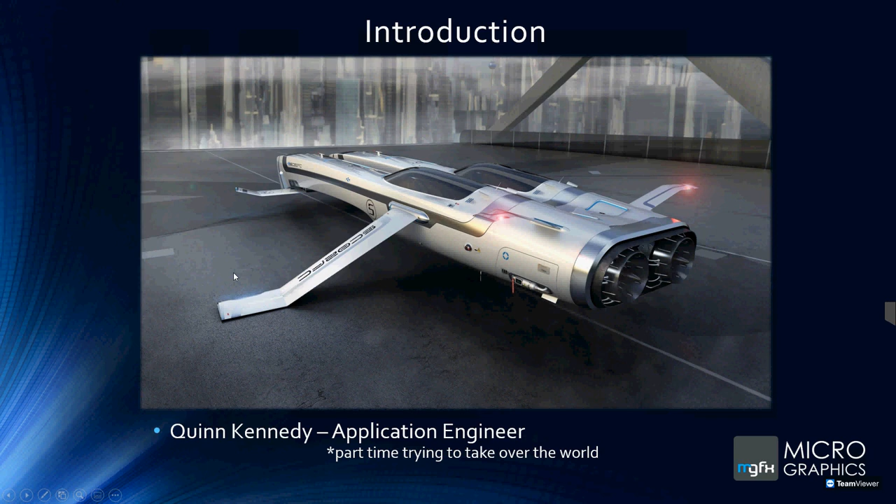So apart from that, for today our agenda, what we're going to be looking at: a quick look at what is actually the catalog and spec, why should we use it in P&ID, and how do we then link the P&ID to the 3D to make spec-driven PNIDs.

Then we're going to go in a slightly deeper dive as to how we can create new components in the spec editor. In my personal opinion, a little bit mislabeled being a spec editor, but I'll get to that. And then how to set up the connections between components in the spec, how to set up new joint types, etc., how to create some basic specs in the catalog, ordering your components in the priorities list, and then lastly, go on a bit about the branch editor itself.

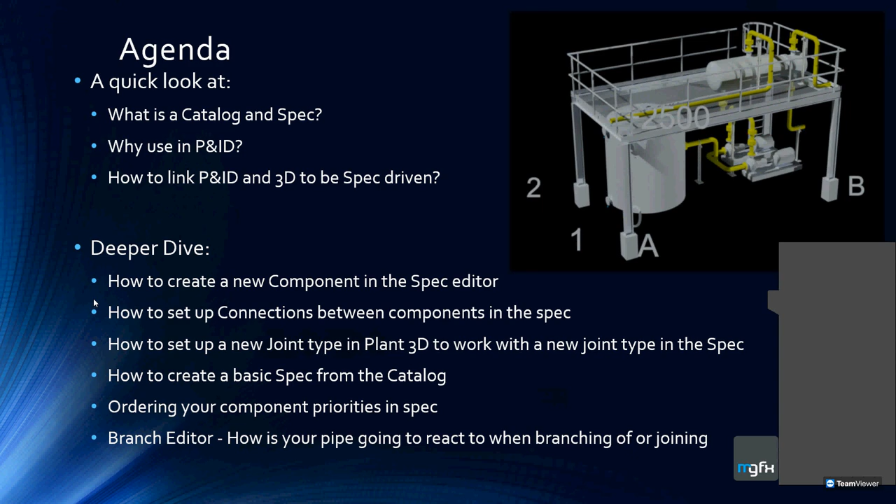So moving swiftly along, I'm really not going to try and make this a death-by-PowerPoint type system. I'm going to be working a lot in the actual program, showing you the various systems as we work through it, you'll see exactly what I mean. But I do have a few slides here to show you, just to give you a better idea as to how things actually come around.

So first and foremost, what is a catalog and a spec? Now you'll hear us talking about this a lot. By the way, American spelling, don't accuse me of misspelling things. That's the way Autodesk spells it.

So yes, catalog - easiest way to think of it is an entire warehouse of all your parts, all the components, everything, basically everything crammed into one system. Now, it would be illogical to work with a project with maybe every single pipe size and every single bend possible and everything, because it would blow your project up massively, and it may make it difficult to find exactly what you want. And this is where the spec comes along.

Now, this is the reason why there's a big difference between your catalog, which is everything in your system pertaining to specific items, and your specs, which you can think of as a shopping list. Like your shopping list, as you can see on the right-hand side, it would be your milk, your juice, butter. So that would be our specific type of pipe.

So if you're looking at Sans, it would be like the Sans 62 pipe, and then that would go with its related elbow. I know that they've got one of the ANSI specs or something like that that works with it. But that being said, your spec then is actually your list that's taken directly from your catalog, and it references back into the catalog.

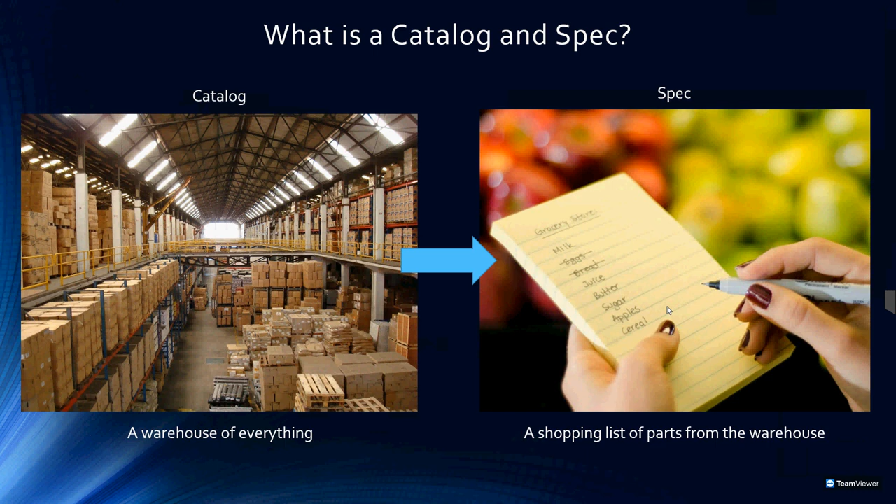So we do use spec and catalog interchangeably, but generally if you're referring to creating something - and that's what I mentioned a little bit earlier - it's about your catalog, because your spec editor is actually not just editing your spec, but your catalog in the background. But I'll get to that a little bit later.

So what we're going to also talk about now - and I'll show you the actual creation of the parts a little bit later - but firstly, why do we want to use our spec-driven PNIDs actually in the P&ID side? Because everybody's like, hey, wait a second, why don't you want to rather use that in the 3D side and keep them separate?

This can be a yes and a no question, because if you've got - which a lot of people do have - people who are working only on the PNIDs or only working on the 3D elements, you need to make sure that they're both using the correct components at any one point.

Like, for instance, if you've got maybe SS304 or SS316L or something like that, you don't want them to put in something that's maybe out of size, out of spec, not going to be used, etc. on that line. So it can immediately flag for them what is incorrect and point out straight off the bat that there is something wrong here.

So if you take a look on the right-hand side, you can actually see my 900 line. Maybe that was supposed to be something else, and somebody accidentally routed that line as 900. You can see it's already popped up at 900 there. And that is the correct one at 100.

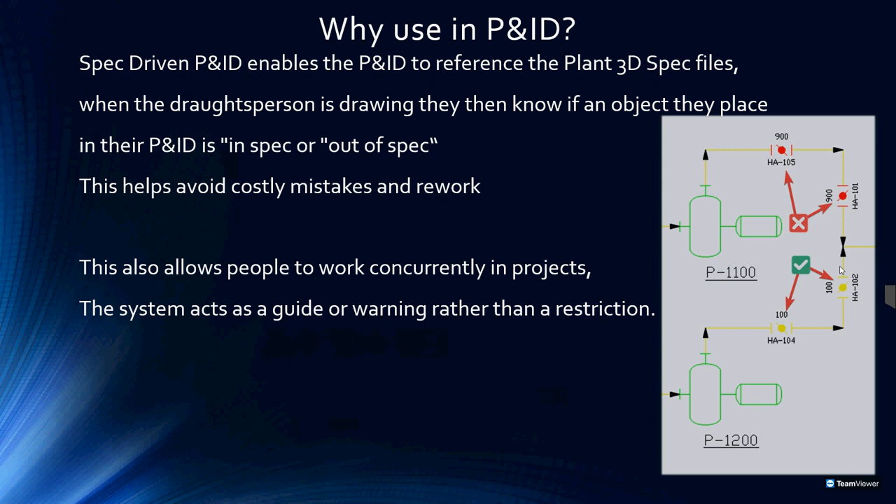You can see the line is the same color. The way that you actually do this is when you turn it on, which I'll show you in a bit, it actually then flags as you're drawing, is this correct? Is this in spec? By default at the moment, it is turned off for facilitating for projects that were created before, but it is very easy to turn it back on.

So how do we actually turn this on? That was pretty simple. You firstly just go into your project setup. Then underneath your P&ID DWG settings, Pipe Specs in P&ID, you just have to change it from a standard project, where it is generally sitting in, and this is what it should be by default, but change it to spec driven. And that's basically it for enabling a spec driven project.

You may need to, though this is unusual, actually go and map out. So you basically tell the P&ID side, hey, wait a second, this is what you're talking to in the 3D elements. And to do that, you'll see in the same place as how we were getting into our P&ID DWG settings. Underneath that, there's a little part which is Pipe Spec Object Mapping.

And that's pretty simple. All you have to do is go down the hierarchy, go into whatever object you're looking in. You may need to toggle between the different components from pipeline, valves, normal piping components, or specialty components.

By the way, I sometimes do get asked this question, why is there a difference? In fact, they're just trying to make it a bit simpler. Your normal piping component would be anything you would have in a normal pipe run without any specialty things in it. Basically it's something like what you would encounter in any single pipe run, so things like your elbows, your T's, your reducers, just simple items.

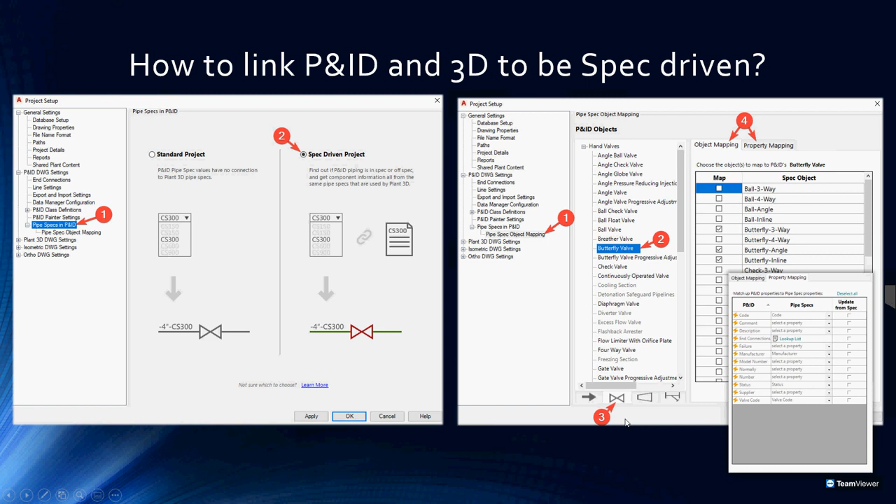So this is actually how we can then very easily make sure and check that our P&ID is going to work. It's going to speak the exact same language as our 3D model should, because if you are working with the same spec that your 3D guys are using, there's no reason why you should run into any errors there. You may run into the unforeseen thing that nobody's taking into account, but that would be the exception and not the rule.

Cool. So now that was basically our quick overview as to touching on the P&ID side. Now, the main thing that I normally get asked a lot is actually more in the 3D side, and that is things like this. So how do we actually create a component in the spec editor? How do we set up these connections and make these things work? Because if anybody's actually done this before, you would have realized that this is not the most straightforward and simple thing.

And if we jump actually into our spec editor, so this is our spec editor, and most people arrive here normally and they were like, oh, well, that's interesting. There's a lot of stuff here. Very interesting to see. Now, this is where it gets a little more difficult. And what I do normally say is, it's a good idea to start off with another pipe spec and catalog so you can see what other people have done and what works. But in this case, I'm just going to show you from scratch as to what we're going to be doing.

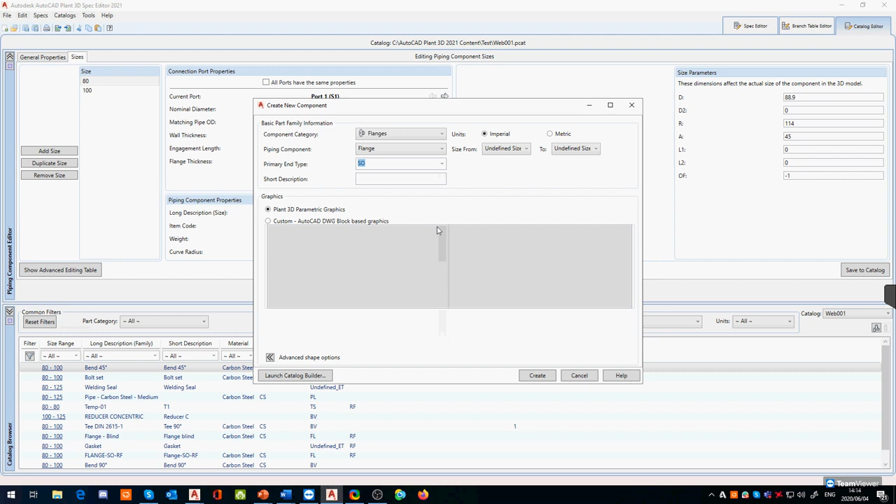So let's go to flange again, and I'm just going to select. If I remember correctly, this one was SO. Nope, not that one. Okay, just to make our lives a bit easier, I'm going to scroll across and find one that's similar to what I'm looking for. Let's just use the lap flange one, it'll be fine.

Select the sizing. In this case, I'm just going to go 80 to 100. Or let me just do 80, or 100 actually, that'll make our lives nice and easy. If you did have a range, you could do a range.

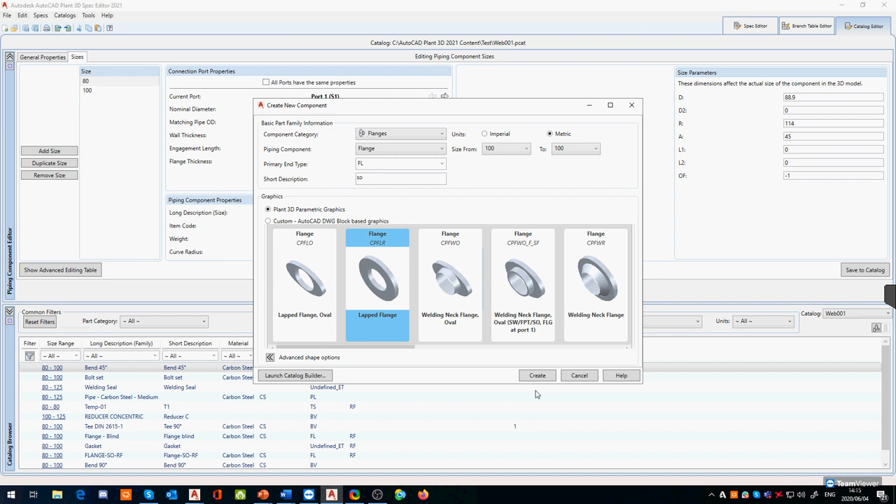Now what this will do is it will try and auto-populate a lot of it with default data. But when I go create, you'll notice that it does pull through some default data, but it's not a lot.

So in here, I can put in basically, this is, by the way, a key thing: you want to make sure that your pipe ODs match. Your pipe ODs, if they don't match, can cause you issues later on, and I'll show you what I mean when we get into a joint. That's 114.3. Yes, I use plant way too much that I know that offhand.

Length is 18, if I remember correctly. Diameter on the outside would be... D1 for 100, that is 220, if I remember correctly.

In this case, I'm just going to put flange as my long description. Flange 100. Now here's a quick trick that people always forget: a flange and most other objects have got not one port, but 2 ports.

And this is where a lot of people fail, in that they will go and prescribe for one port, but not the other port. And a thing like a flange, sometimes it's okay. What we can do is just say set all ports to the same.

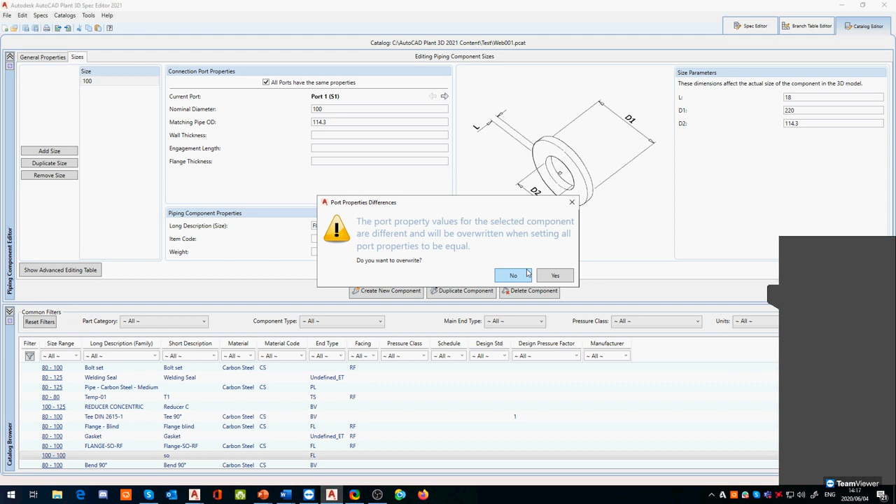It's going to give you a query: are you sure you want to do this? You can say yes in this case. Sometimes you don't, sometimes you do. This is very situational, and I'll show you now a small exception, what we do especially for things like flanges, which we have to be careful with.

Once I'm happy over here, I'm just going to jump to my general properties. And now in your general properties, you have to be very careful of 2 or 3 things here. Firstly, you have to give it a proper name because you and the computer has to know what you're busy calling out. So in this case, I'm just going to say it's going to be my SO flange

TMP. You can give it a compatible standard, but most of these other ones won't give you as much of an issue. You do want to give it maybe a short description. I'm just going to copy my description over there. But most of these, just make sure that whatever you're going to be mating it to, which I'll discuss a little bit later, is going to be the same.

Because if things don't match, it is going to give you issues down the line, which I'll show you now. Weight unit, kg, and these 2 are very, very important, because if you mess these 2 up, when you produce your ISOs, it is going to kick up problems.

Now for instance, I know my one over here, it should be, if I remember correctly, FLSO, so slip-on flange. ISO symbol key, I can't remember that one straight off, but I'll quickly look that up in a second. I'll come back to that.

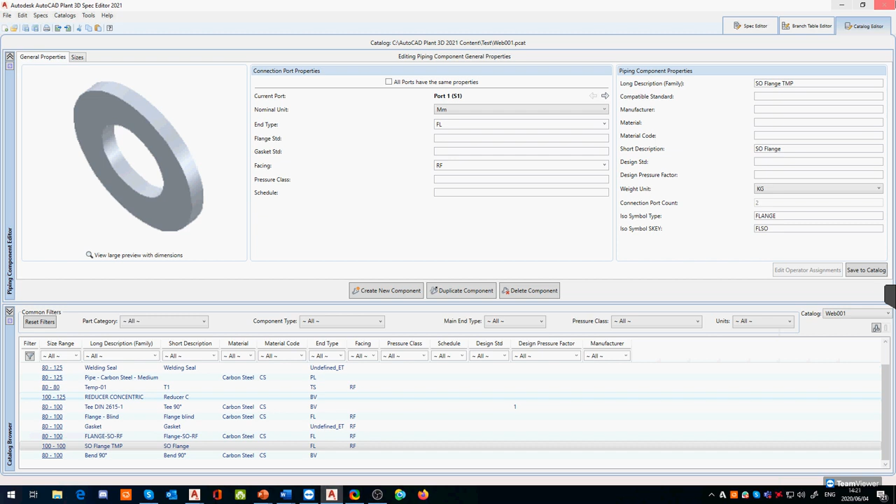And basically that is a very basic way of individually creating your parts. Just make sure, like I said, if you're in doubt of any of these, do what I've done here. Don't be scared to jump to another catalog, like there's the DIN one. And if I'm not too sure what something is or what it's supposed to be, I jump to, let's say, this elbow for instance. Elbow, there's its ISO symbol key, there's its information. So it's very fast and easy to just jump around, find a similar item, and then figure out what data you need to pull across.

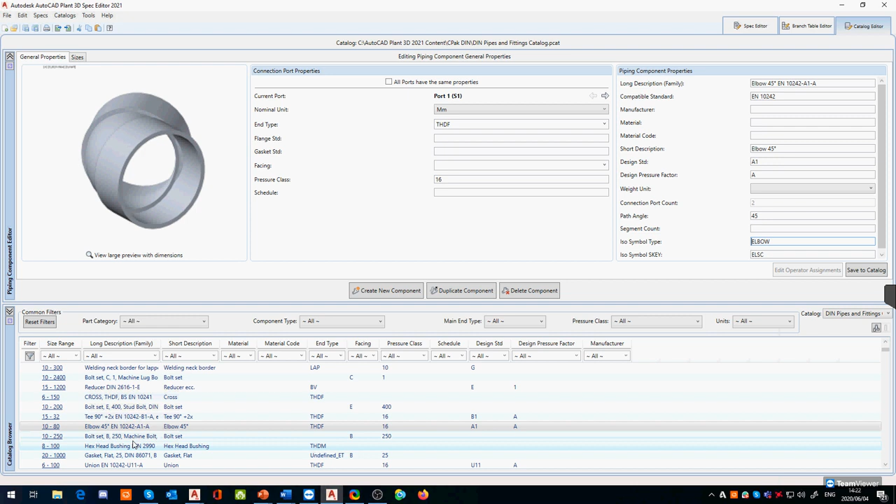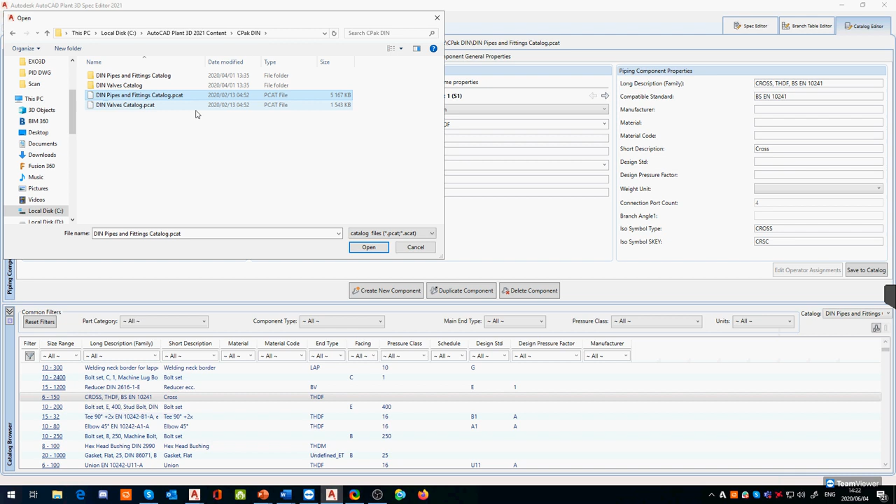And what you can also do, by the way, if you are inclined, is right-click. You see I'm in a different catalog completely, and if you need to open another catalog, you can just go open, and it should bring you to your location where it's automatically installed, and you can then find another catalog to open. I've currently got this one open, I'm just going to hit cancel here because it was pre-opened when I opened the system.

So for this case, let's say I like this tee. What I can do is right click on it, go copy, come back to my catalog drop down again, and go back into the one I've created here, and right click and paste it in. So you can actually grab bits and pieces from other catalogs and then reuse that data later on.

I do caution you to be very careful here because, like I said, if your sizes of your matching pipe IDs, sorry, ODs in this case, are not correct, it is going to kick up errors and cause you a world of problems. It can be very difficult to edit lots of information at once. This is when we will start using export to Excel, but that's a whole other garden path. I've actually written a blog and a few other things on this, which you can catch on the Micrographics blog site.

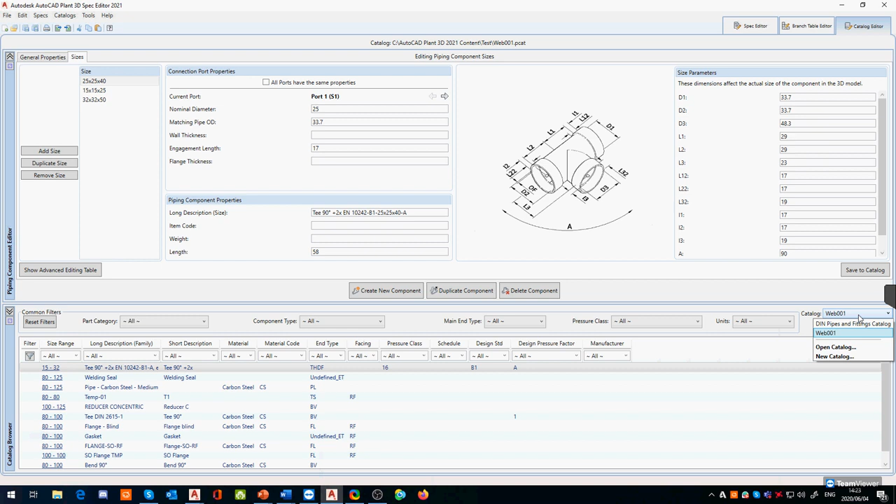Okay, that being said, this is how we would basically create our parts. Very, very, very quick intro into it. There's a lot that can go into it, and you can go all the way down the rabbit hole if you want. But now that we've got this parts, where do we go from here?

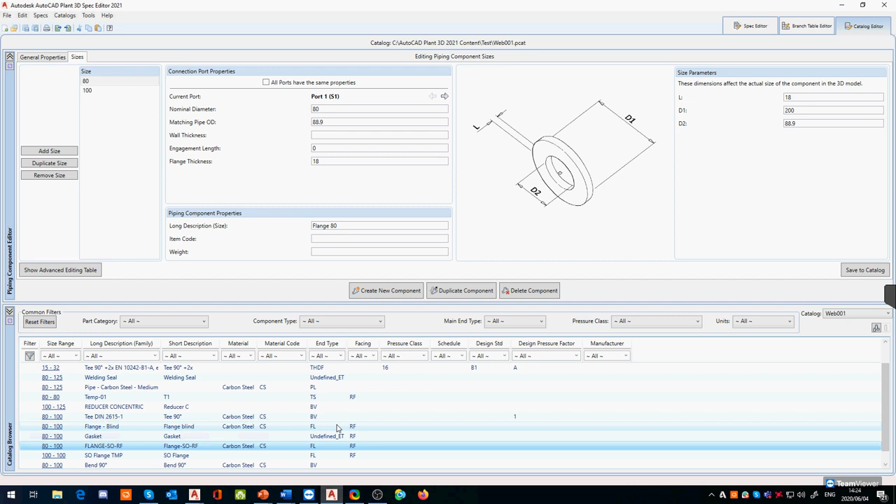In continuation of our rabbit hole, that's how we'd then set up these joints and stuff with it, and also with the spec itself. So using this, what I'm going to do is quickly create a spec out of the system. In this case, if I jump to my spec editor, my spec tab, you'll notice that I don't have any specs in here. I don't have any spec in use.

So what I can do is go File, New, create a spec. So what am I going to call it? MGFX 001. I know, very original. Load a catalog - if you do have a catalog that you've got currently that you want to load in and then edit with it, you can do that.

In this case, I'm actually working the other way around. I've already started working with my catalog, which I just find is an easier way of working, because I've already started with my warehouse of all my parts. And now what I'm going to do is take that warehouse, weed it out, and create my spec from here.

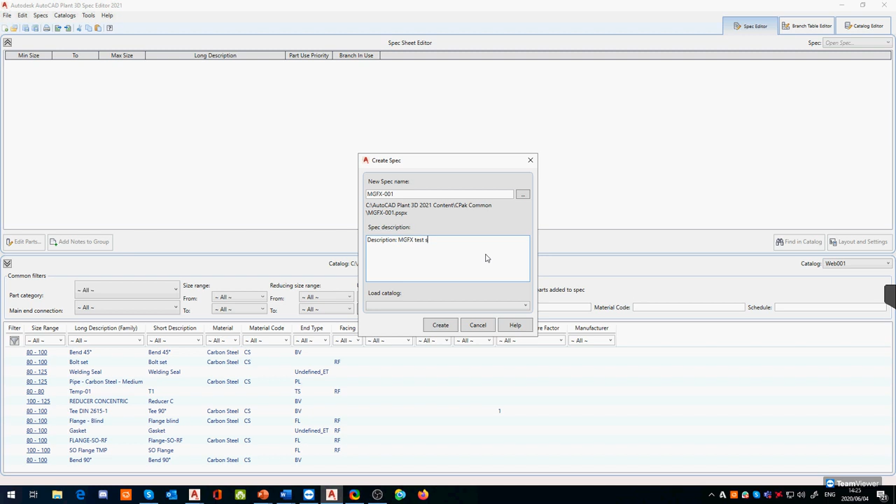Description, so I'm going to call it MGFX. You don't need to fill this out, I'm just filling it out for interest's sake. So, MGFX test spec. And I'm going to create.

And as you can see, I've got a wonderful blank spec. It just tells me the name of the spec, where its file location is, and some other information like save date, time, etc. At the bottom here, you can actually see my catalog that's already been opened. And if I jump to my catalog tab, you would see it's exactly the same information.

I'm just going to jump back to my spec, and I'm just going to select all the information. I'm going to shift and left click, and I've just selected all this information here. And I'm going to click add to spec. So now you can see all of it is now being added in here. Pretty cool.

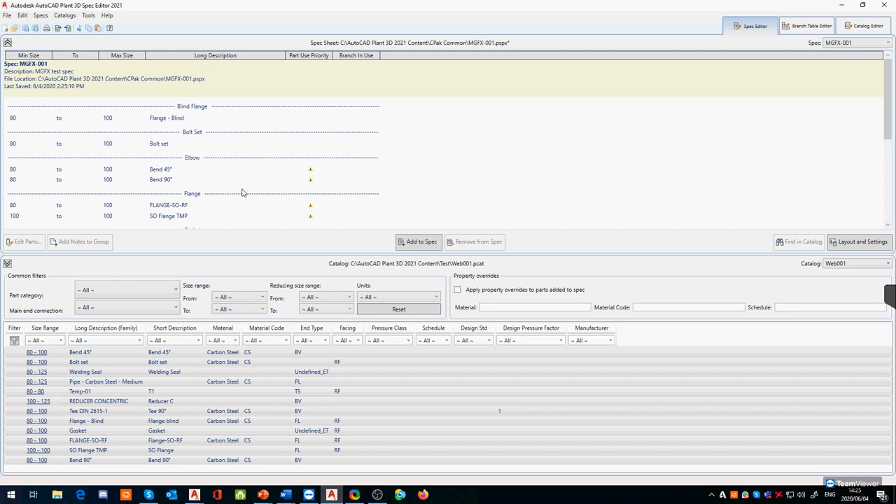Now, one of the things I'm going to get into a little bit later on is also this ordering part, but I'll get to that in a sec. So to actually run this off, what we've actually done is created this base spec, and we could hit save and carry on from there.

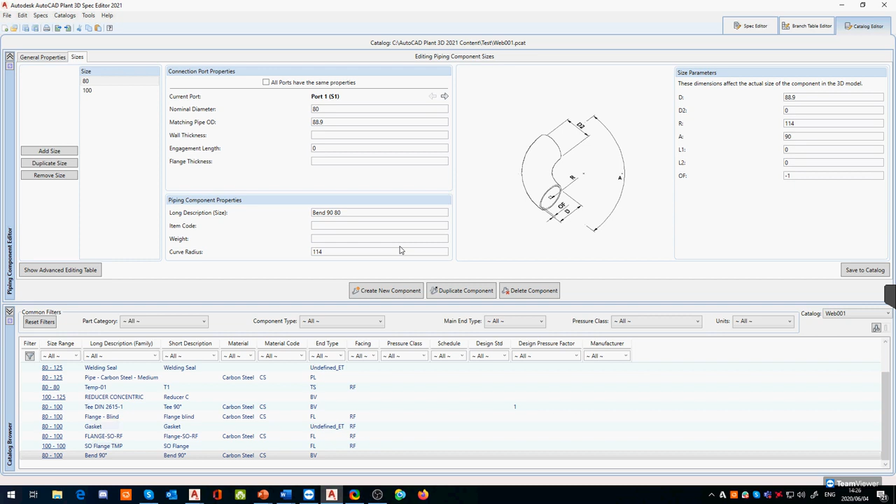But one thing I wanted to touch on beforehand was these little things we've been talking about, which is the end types. Now, this can be a little bit more difficult to get because you need to know that plant is separated into two areas - between the spec editor and also the back end of that intelligence that sits in the plant program itself. So you kind of have to know to do this in two sections.

So for here, for instance, with this temperature gauge, all I've done is created a brand new type called TS, temperature sensor. I don't know, it can be anything - you can call this whatever you want, you can say hello as a type if you wanted to. But for this case, I'm just going to keep it as TS because it's a new one I've made, temperature sensor. So that is what its end type is. You'll notice though, it's only got one port connection. So you can create this temperature sensor as whatever you want.

So once you've done this on the spec side - well, that's all you had to do here. Now what you have to do is create this on the plant side. I'm just going to quickly jump to my plant section. Oops, keep opening up the wrong one for some reason. Ah, there we go, sometimes it helps if you click the right window, hey. So now I've got my lovely plant model over here, just a little test one that I love to play around with.

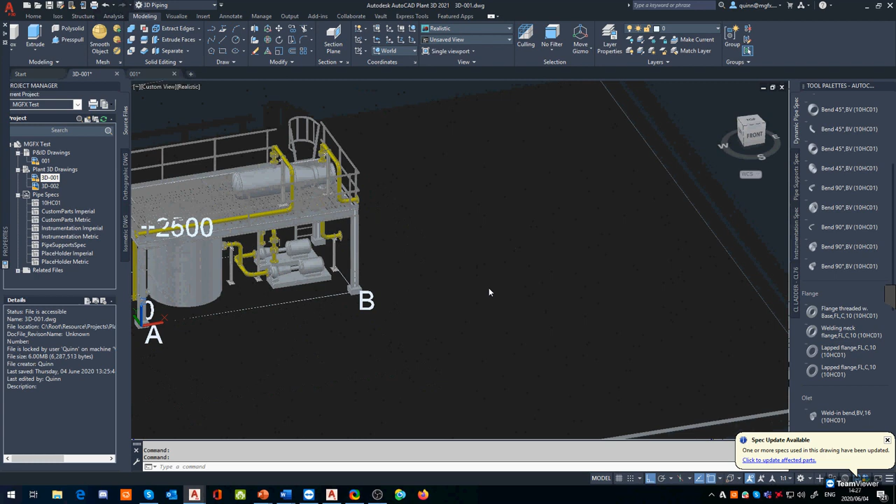But over here, what I'm going to do is quickly create the endcode for it. So plant endcodes is what we're after. You have to type in this command - I know it's a bit of a strange one. Just ignore the spec update bubble at the moment, but we need plant endcodes. Once you click plant endcodes, this plant endcode menu will pop up. Now, this is why the system is a bit convoluted and people don't do this correctly.

And I wonder, why is none of these things working? Why do I keep on getting these errors? This is one of the reasons why we keep getting these errors, actually, because they don't know about this specific step. And this is quite important.

So in here, you can actually see I've edited this in. But I'm going to just delete that endcode out. And I'm going to go add. And it's going to ask me to add an endcode.

So this endcode name, remember what we called it in the spec side? We said it's TS, that's its endcode, and what description it has. In this case, the description is it's a temp sensor. I'm being just a little bit lazy here.

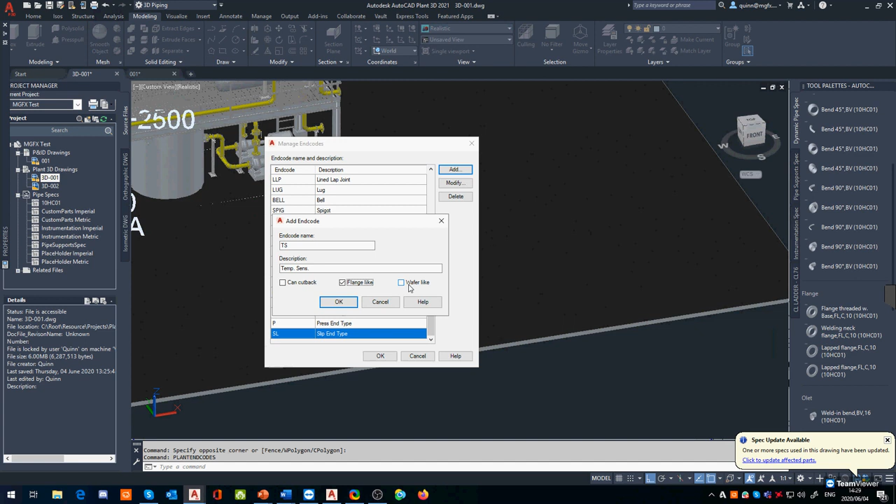And these are just extra options that it's going to give you. So is it going to be able to create a cutback joint? Is it going to be flange-like, which it actually is? Or is it going to be wafer-like. Just remember, wafer would be something like a butterfly valve. It's sandwiched, the butterfly valve itself is sandwiched between two flanges, hence the reason for a wafer connection. And if you actually do ever edit a butterfly, both of the ports are going to be wafer connection. I'll get to a little bit more on the ports in a second.

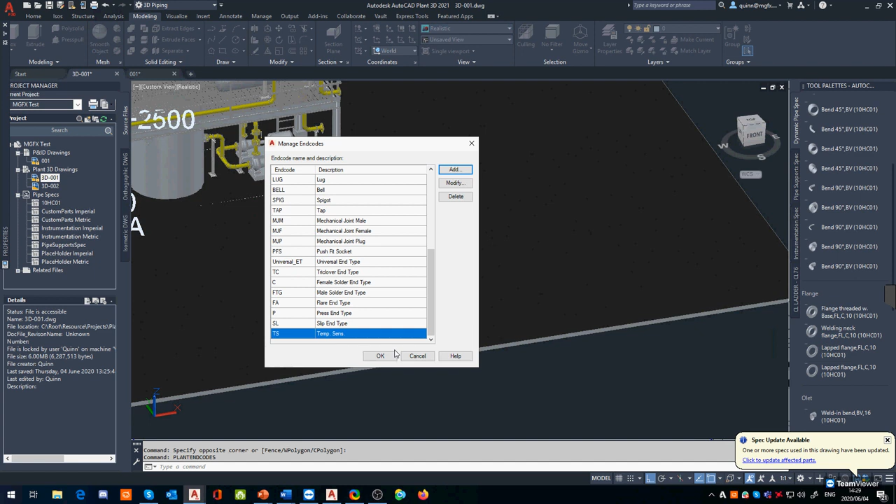For now, let's add the endcode. I'm just going to go OK. And you can actually see I've got my endcode TS and my temperature sensor in the description. And you can see all my other endcodes. Once you're happy that those are the ones you want, you can click OK.

And believe it or not, there's still more we have to do in the back end. As I said, a little bit convoluted. But in our Home tab, we just click the Data Manager, or Project Manager, sorry. We wait one eternity for the Project Manager to open.

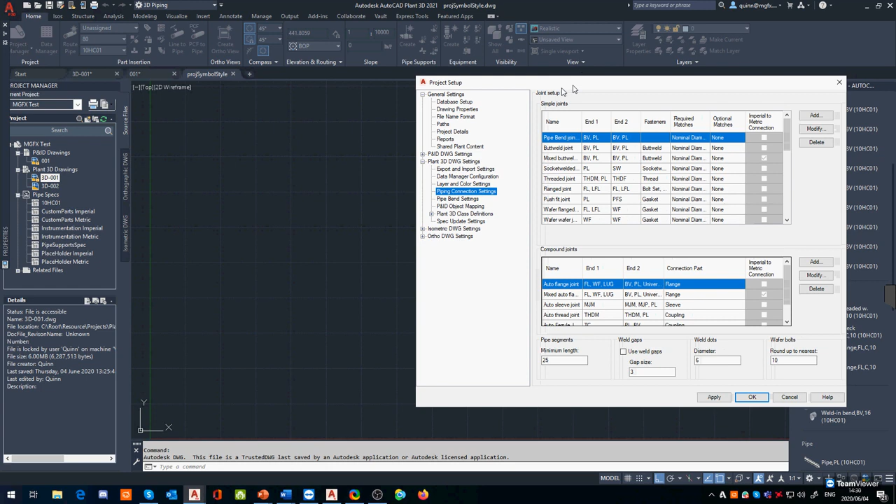Now, inside our project setup again, in our Plant 3D drawings, we have got our piping connection settings. So if you scroll through this, it can be quite daunting to try and figure this stuff out. But if you approach it just slowly and logically, it starts making sense.

Firstly, a simple joint is exactly as to what you would think. It would be, how does something like a flange connect to a piece of pipe? What joints are allowed and what joints are not allowed? In this case, you can see the pipe joint BV, so the butt weld, is able to connect to itself, BV, and also plain, and vice versa. So these two are interchangeable.

Same with the butt weld joint below. That was a pipe end that I was looking at. Mixed butt, same thing, but now socketed. It can only be plain to socket welded, or SW.

Now, how do we then add our own one in here? It's quite simple. We can either go add, and we can add in our own completely new joint, which is pretty simple. You just have to go TS, whatever it is. The display name itself is going to be, let's say, our temp sense again.

Now we've got our connection settings, and this is where people get a little bit confused because they've got the same stuff duplicated either side. But what I normally suggest is just, if it's going to be a single side, select the same as you would on one side as you do on the other.

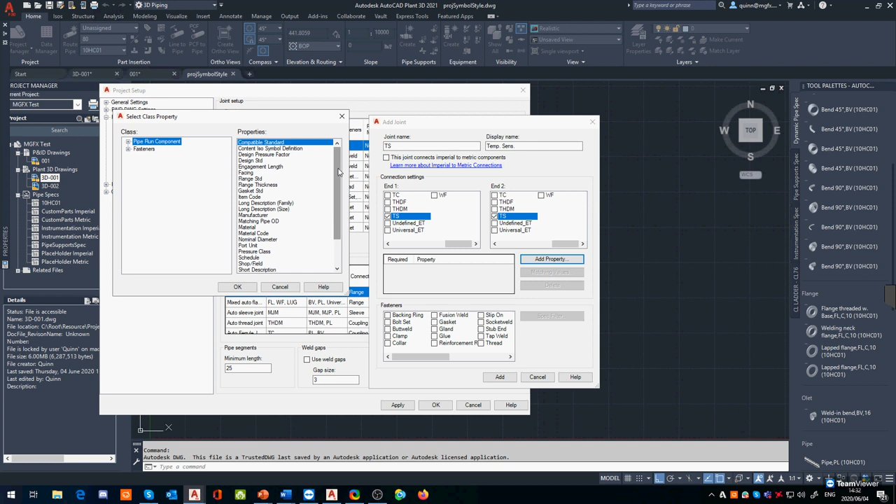So you want to do things like match the pipe ODs. Make sure that the pipe ODs match 100%. Add another property, because we want to do things like, does the facing match? So you'd see facing, do the faces match?

Cool. And vice versa, you can add all these, or what you could do is click on it and take them away if you wanted to, just in case you maybe want to loosen up the spec a little bit. You also get your fasteners.

How are they going to be attached together? In this case, something like a bolt set. Or otherwise, are they going to be welded? Depends on what you want. When you go add, doesn't look like much has happened, but if you scroll all the way to the bottom, you can see your new one has been added.

If you do get lost, if this is not making sense, like I said about the spec side, select just one of these, let's say the flange joint, and go modify. You can actually see all of the stuff, how it's set up and how it's working already defined, and this may aid you in trying to create your own ones.

For this case, I'm going to use my flange joints, and I'm going to go to my TS and just check them both, because this means that they will automatically apply. Then instead of normal accept, we've got modify. We can take it from there.

These compound joints that you see at the bottom here are basically, if you chuck a flange in the middle of a pipe, what's it going to do? In this case, you will auto flange it, connecting a flange to a flange, or however it would then add on. That's what this connection part is over here, a little bit more complex. I'm not going to get too much into that right now.

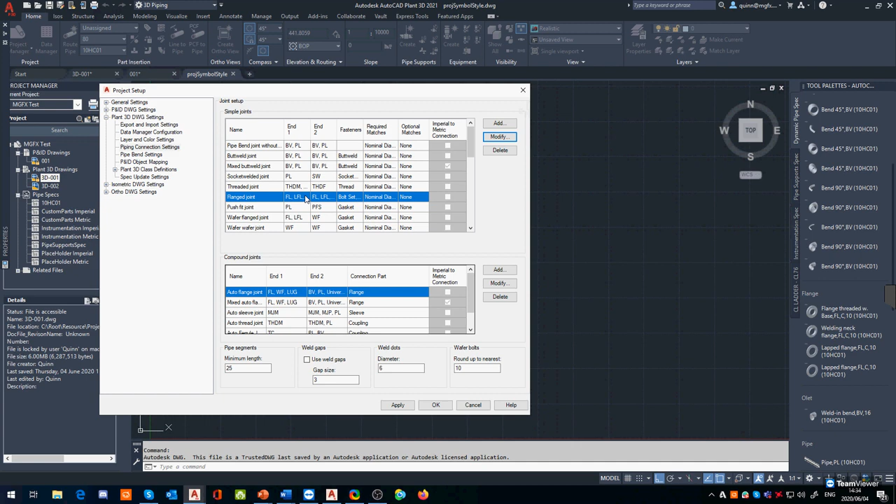What I wanted to do is just show you how this stuff is brought across. So with that, I'm going to click OK, and this is all the backing done that we needed to put this part together. I'm going to jump quickly back to my sheets over here, and remember my spec editor.

So this is part priority. This can be very useful because a lot of people complain, why when I'm trying to route my pipe, why do I have this 45 that keeps on going off every single time instead of my 90? Because your part priority is wrong. Now, you don't need to specify these, but it is very useful.

Now, in the actual real world, when we're routing pipe, this is what we want. We want our 90 degree to be used primarily, unless we want to change it to a 45 degree, because not as often we're going to be using the 45s. If this was the other way around and 45s were used, it would mean that if you did bend the pipe 90 degrees around, it's going to use two 45s instead of one 90, which if you start routing pipe in it, you'll get annoyed with it really fast. I can promise you that.

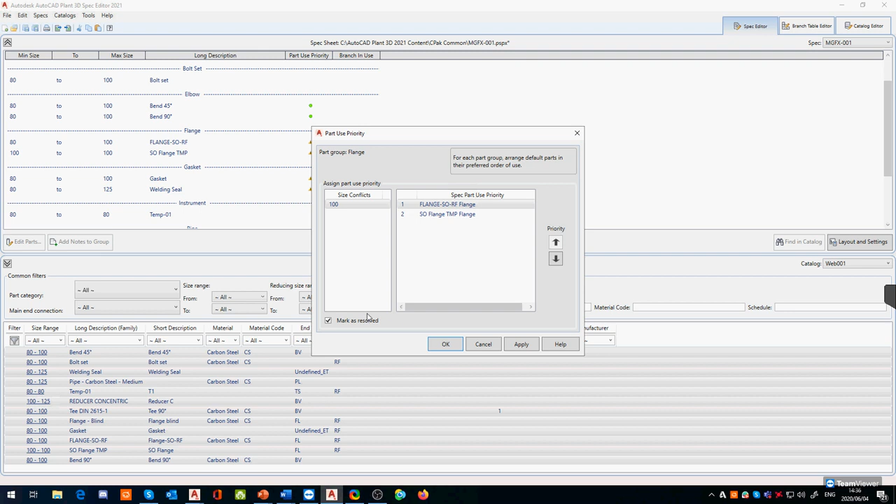Actually, I think in this case, I'm going to select this one, and I'm going to make sure that my size conflicts, my created one over there, is set first, just to make sure we avoid any issues.

So now that our spec is done, how do we load this into a project? This is pretty simple. If you were firstly creating a project, if you're starting from scratch and you didn't have any projects created, that would be the easy part. But now I've already created this project. What do I do now?

Because I can't just pull all the information, because when you first create a project, it's going to look in that catalog folder where everything is stored and bring everything through. And if you've ever expanded this list in a project manager, you'll know that this can be a lot of information. It's in fact an overload of information. So one of the first things I do is I go and I de-weed.

I'm merciless. I'll go through the whole thing and chop out anything that's not needed. Then what I do is populate it with the correct data, just to make my life easier. Or otherwise, I'll just chop out the stuff that's not needed.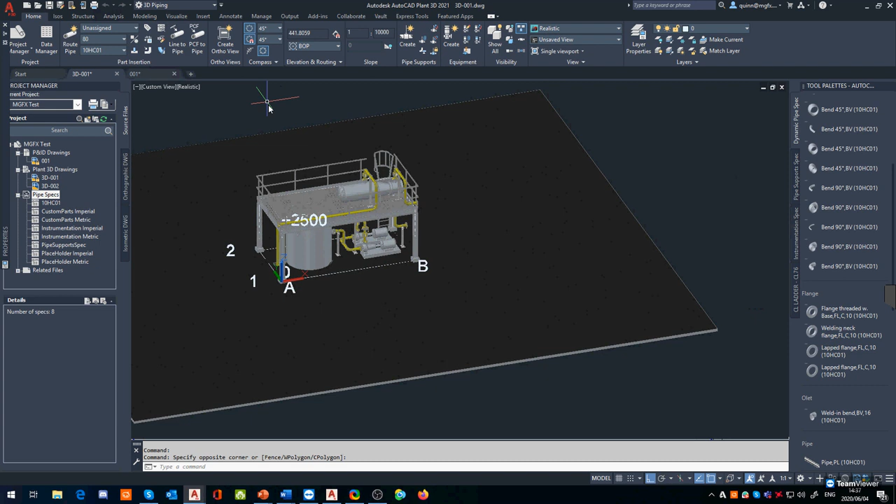Now that I've got this project already created and open, I want to load in the new one. It's very simple to bring this in. I'm going to right-click on the pipe spec and say copy specs to project. This will look in the original file location. I know I've saved it somewhere, and lo and behold, there's the one I created. Remember, the MGFX 001 and the timestamp at 25 past. Time flies when you're having fun.

When I go open, it loads it into this project. Now here's a critical little fact. When you do this, it's loaded it into your project. If you do want to edit the spec again, you have to remember to edit the spec itself, because it's created a clone, a copy of the spec. It's not referring back to the original one anymore. So if we want to make changes, we have to right-click on it and say edit spec. That would be your easiest way of doing it.

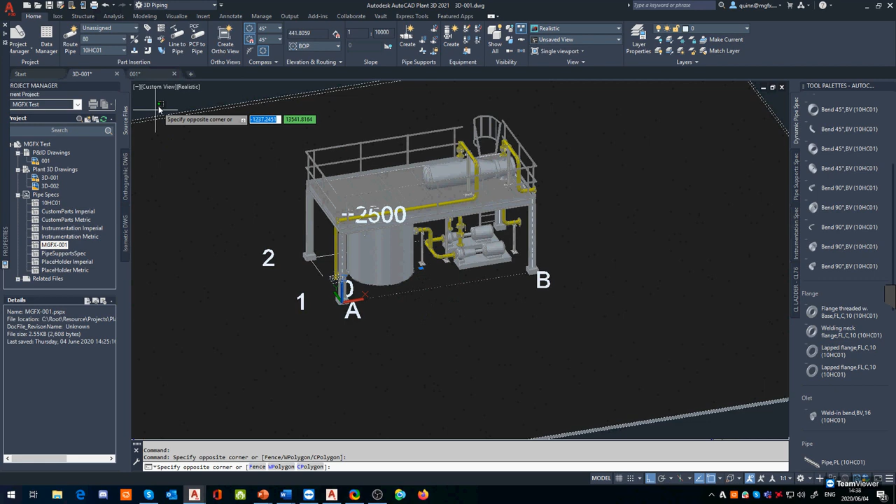Now that I've got the spec down, I can use my drop-down, and you can see there's my spec in the list. When I click on it, take a look on the right side.

Oh, my list didn't populate this time around. Yay, it's just trying to make me look bad, that's why. Let me just save, jump off it, and jump back onto it. Oh, and it's not pulling it through. Let me take a look. It may be on this side that I haven't saved. Oh yes, that's the reason why — it's because I didn't save. This is the reason why you always want to save early and often, as I said previously.

So what I'm going to do is quickly jump off the spec again and remove it out. Yes, I want to remove this. By the way, a lot of your stuff, when you remove it, actually gets put into kind of a trash bin folder in the actual project. So you don't necessarily lose it if you delete it — there are ways to recover it.

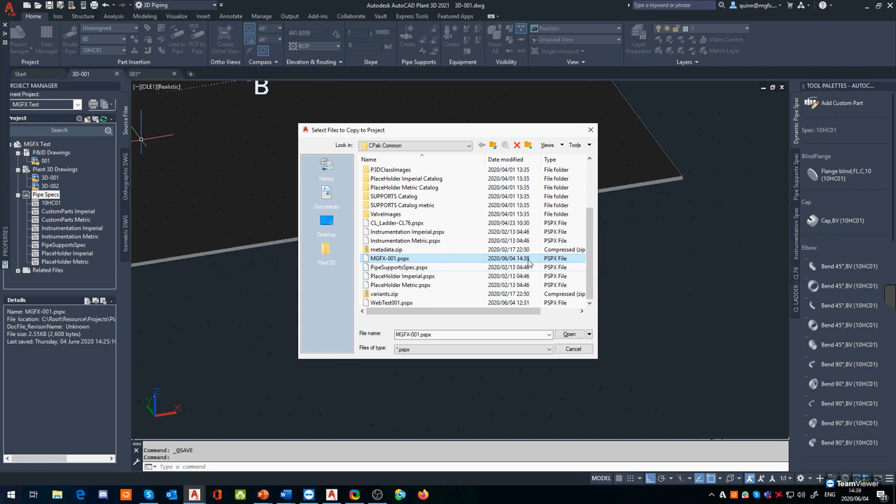I'm going to go copy specs to the project again. Now you can see the time date — we can see it's now been saved. So now, lo and behold, let's click on it. And yay, we've got all of our stuff that we've created. As you can see, this is all our new stuff. So there's my new piece of piping.

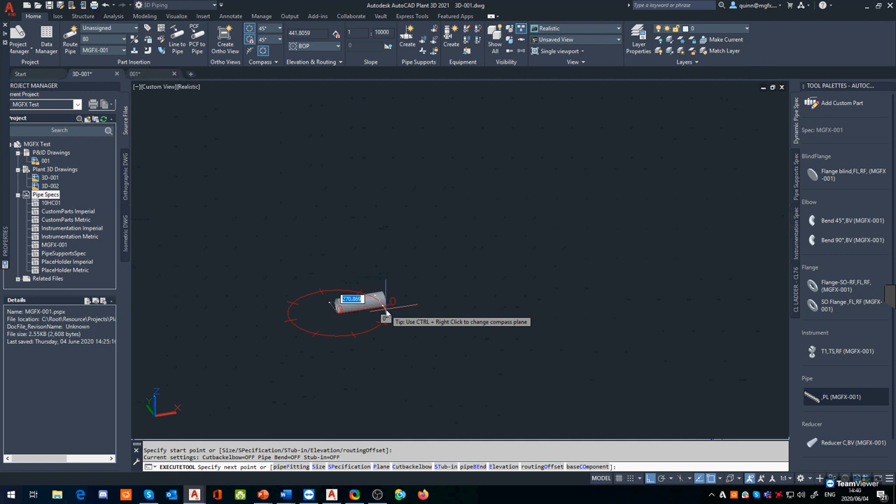I'm going to select my piece of pipe and start routing my pipe. So in here, if I scroll in, this is my 80. If I were to go around, you can see my bends are correct. If I select the center of my pipe, I can route my pipe out. Oh, wait a second, here's a problem — can you see how this T is now broken out?

That will bring us into a section I'm getting onto in a little bit, which is my last section, which is going to be the branch editor.

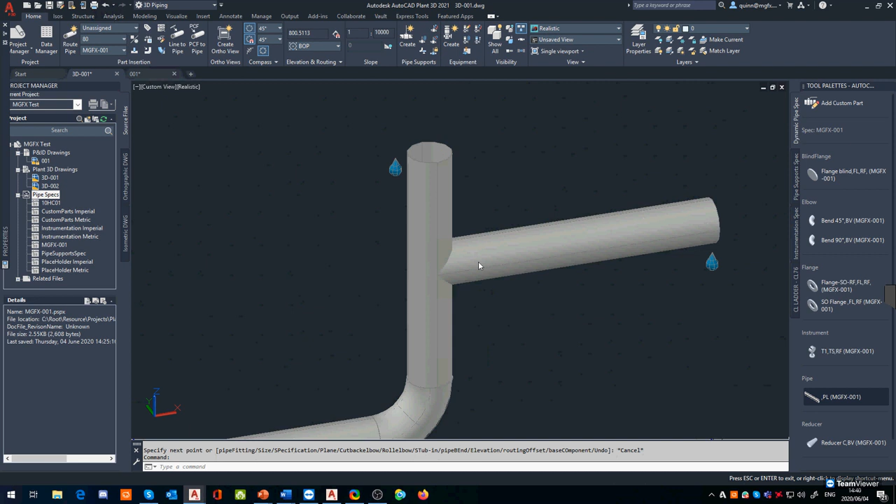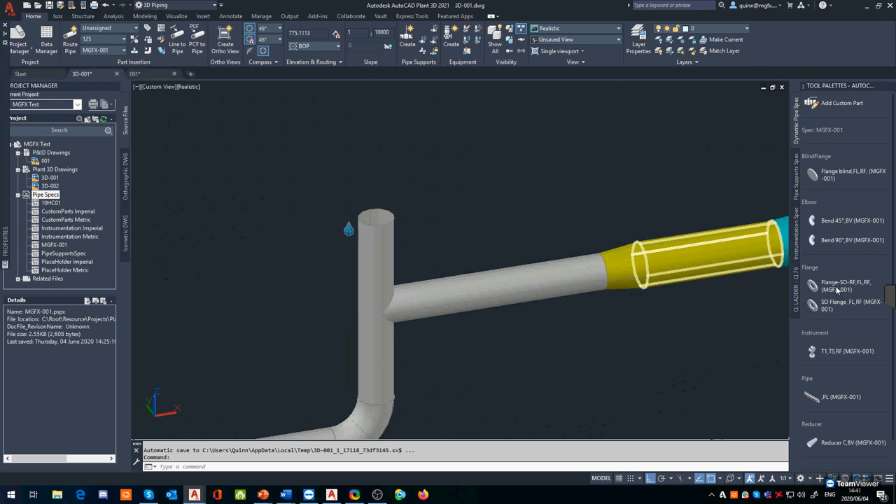Just quickly showing you this though, what I could do is carry on with my routing. I can go into 100, and you notice it immediately chucks in my lovely little reducer. Even though it's going up, it's still reducing. My 125, and it reduces again to 125. As you can see, this is actually a working viable spec. And if I were to chuck my flange on the top — hey, how's that? It even flanges correctly.

Now, if I were to delete my top flange, I can use my temperature sensor and chuck it on top. Remember though, the temperature sensor had that TS connection. If you go into its settings, you can actually see the port name is S1 and the end type connection is TS. If I tried to do this beforehand, it would have failed because that end connection was not there. You've probably seen this yourself if you've played around with Plant a lot — if you're trying different ports and put misinformation in that port, it's going to complain hectically. This is the way you can get around it.

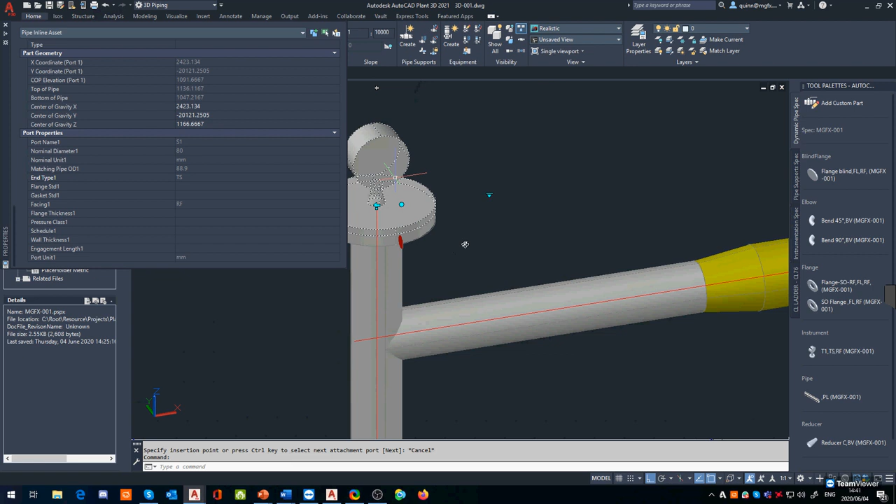So I've now got my very ridiculous looking temperature sensor on an 80 nominal ball flange. Normally, as you'd probably know, this would be about 25, so 1 inch. But for this case, I just wanted to show you this.

That being said, I now want to quickly address what's going on over here, because what you could do - this is actually done more of a stub-in connection, but it's really poorly done over here. So this brings me into my last point.

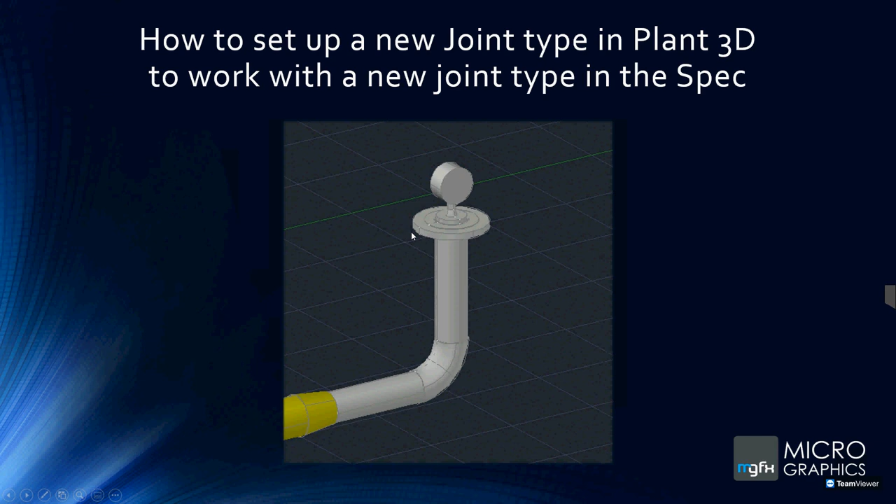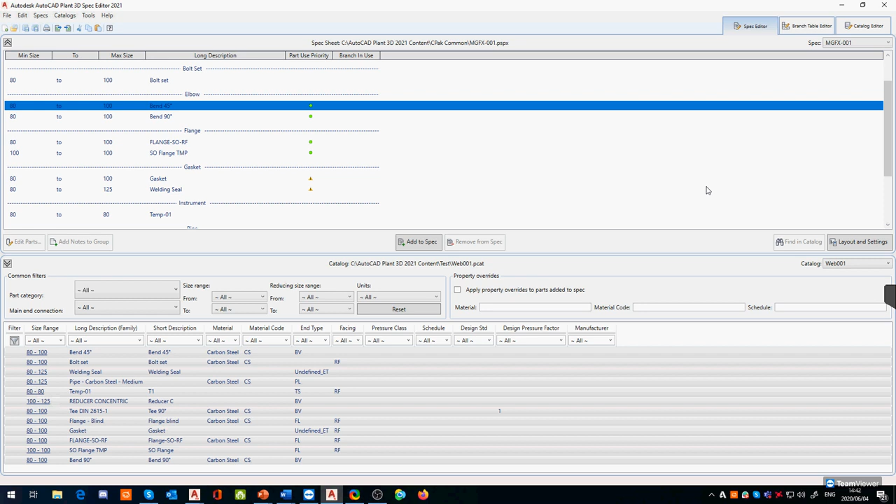So what we've covered over there was basically the joints and the specs, and now we're getting onto our branch editor. So what is our branch editor? That's exactly what this section controls - this type of a joint. Now, the branch editor - you've noticed when I've jumped back into my spec editor, I've been in our catalog, jumped to my spec, and then created my spec. Once you've got your spec created, you have the ability to then go into your branch editor.

In a nutshell, your branch editor allows us to take all of our bits and pieces and say, okay, what is the order priority? How is things going to branch off? For instance, if I click over here and go edit my legend, it's always a good idea to add the legend in first.

We go add a branch. We're going to say, okay, what pipe is going to be used? Pipe preferably, let's see, 80 to 100. Legend symbol, nothing there, because this is just the normal pipe. I'm going to add another one and use a drop down. I'm going to say, okay, if it tees off - you can actually just leave this blank for this case, it's not going to affect us. This is just what pipe sizes we've got available.

In fact, let me just set it properly. So firstly, if we've got a change in size, is it going to T? Yes, okay cool. In fact, let me move that one down. So if it T's and it's the same size, it's just going to be a T90. But if I've got another T...

And it changes its size at all - you don't actually specify the change in size, I'm just going to say it's going to add a reducer. You don't even need to worry about it changing size, but if it does change size, it will use a reducer. So you can see the legend name T actually fills in most of the stuff for you - you don't even need to worry about it.

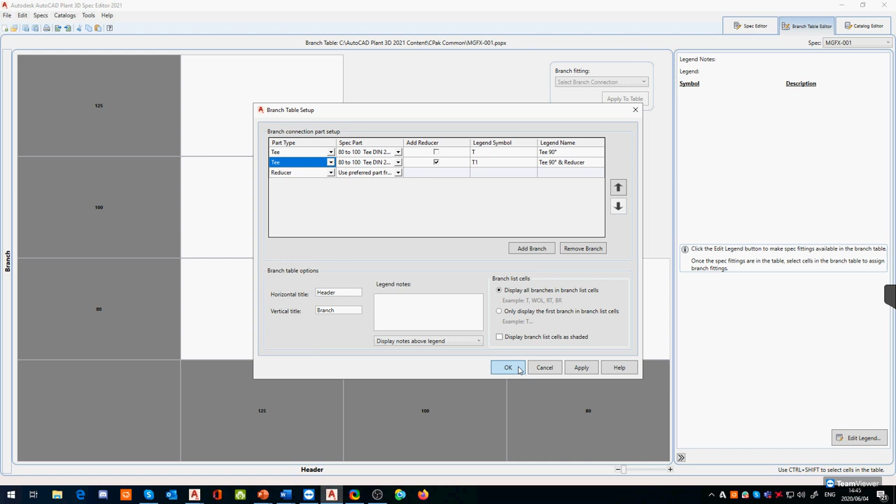Just to rush us along, I'm going to go okay here. Now that we've got that defined, we can say, okay, how is this system going to react? So when we get to an 80 and 100, we can select it and then double click, and we can say, okay, how is this going to react - is it going to just do a T, or is it going to do a T and a reducer? In this case, yes, I'm going to do a T and a reducer.

Say valid branch sizes - I'm just going to click cancel. You notice that if you do something it doesn't like, it is going to flag it in red, so it's like, hey, wait a second, you've done something funny here. So if I put both of them in, select valid, it doesn't have it there.

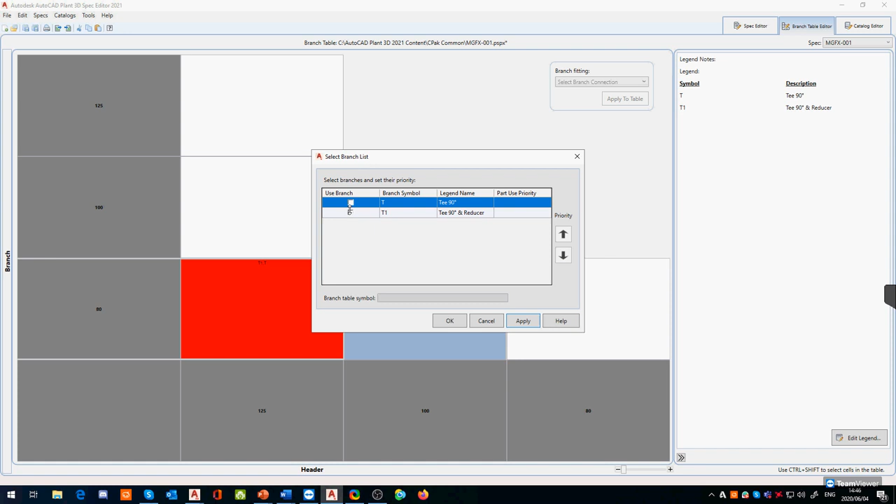So what it's complaining about at the moment is I don't have a valid connection between those two points. If I go T90, there, you notice that I've then got a reducer. I've got a system that matches, so a T and a reducer that matches between this 100 and this 80. And same over here, I could go T and reducer and go okay. So I've got some area in my 125 because somewhere in there I don't have a system that actually works with these two. So I need to go back and say, wait a second, what is wrong with my spec?

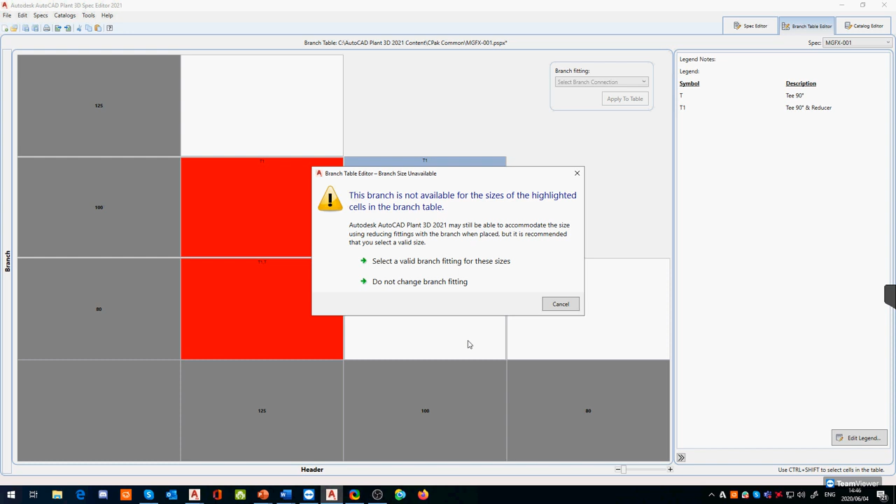As you can see, there's a few things that it doesn't like, but once you're done, you can hit save.

Now I've got a slight problem though. I've got all this drawn, but I've now been editing it in my spec that I already had open. So what I'm going to do is change off my spec, delete it out. Oops, it's gone. I'm going to copy it back in. I should have actually just edited it in here, it would have made my life easier.

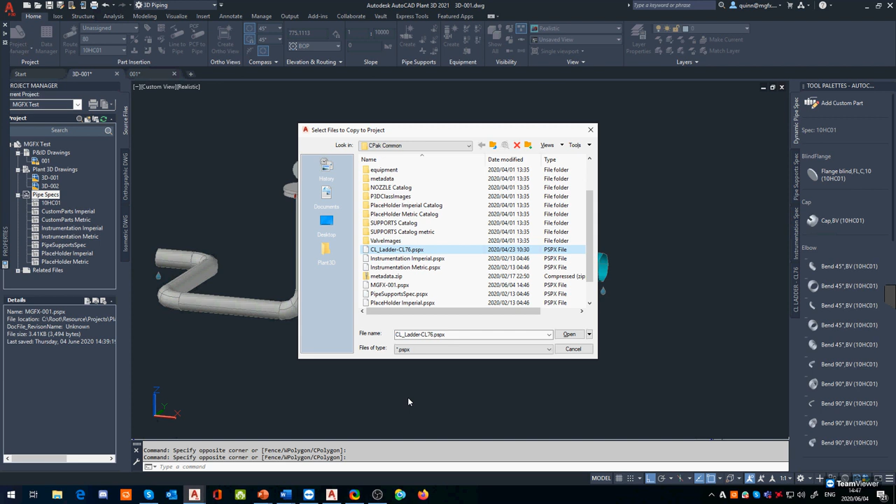There we go, we can see that's its time. Oops, wrong one, that's the one that's been modified. Now what should happen is that when I branch off here, which is my 80 to 100, well actually, let me just create a new one. It's going to load up.

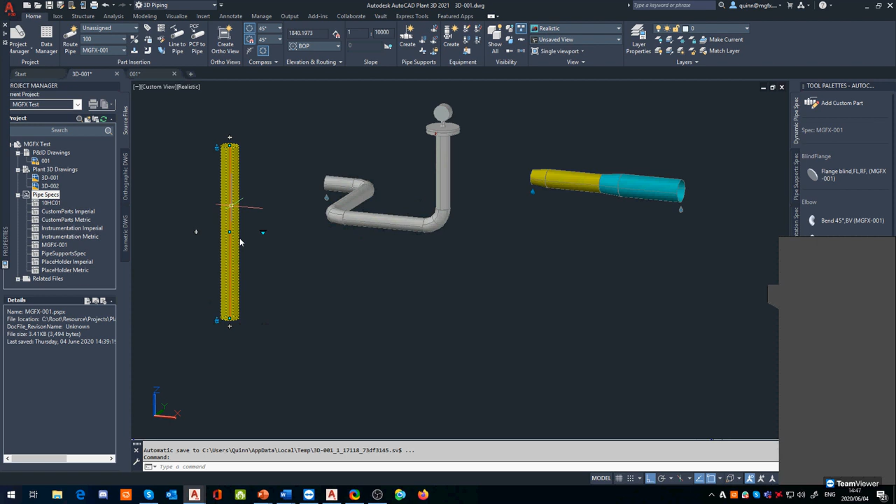So when I've got my 100 pipe, and I branch off here, and it's an 80 nominal bore, haha, and there's our victory. So that's basically telling it, when I just edit that branch connection in, this is how the branch connection is now decided that it's going to put our T and our reducer in, and that is what we determined over there.

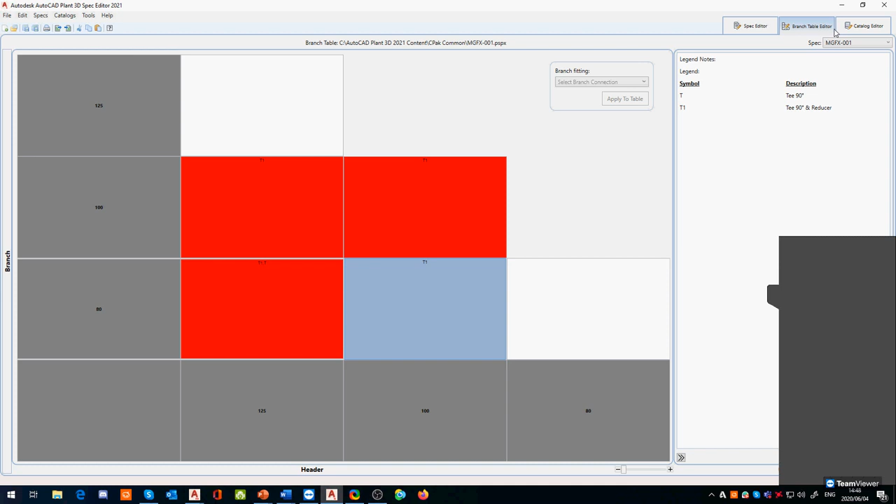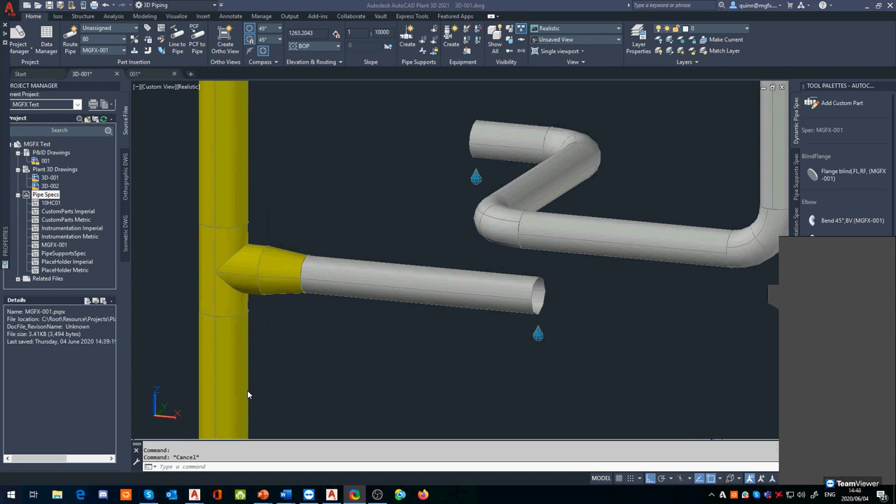To fix these up, I'd literally have to go back into my catalog and determine what the error is, why it's not wanting to combine these systems correctly. It may be a sizing issue, it may be something else. I did actually pull this one off from the DIN, so it may be the DIN one giving me a bit of issues. But apart from that, that is the basics of how you can put your specs together, add some joints, put your table connections together, and everything in a nutshell.

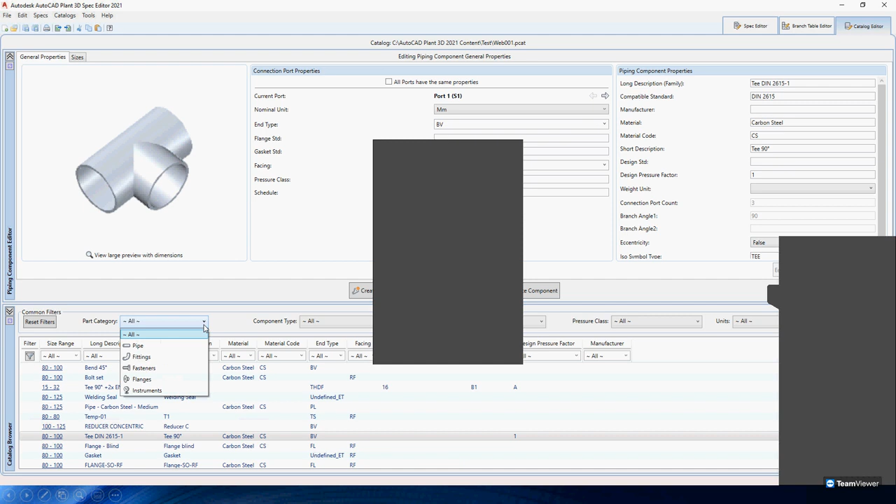That's actually a very good question. Now, bolt lengths are actually managed inside the catalog editor under fasteners. So in the fastener itself, you do have sizes, and this is managed in the background, the lengths themselves. Now you'd have to do some jiggery pokery, but there are ways of actually manipulating in the back end, particularly in the back, that's going to take a little bit to go through. But if you are more interested in it, you can get more out of it in the back end. If you are interested, just drop me a mail and I can go into a little bit more with you.